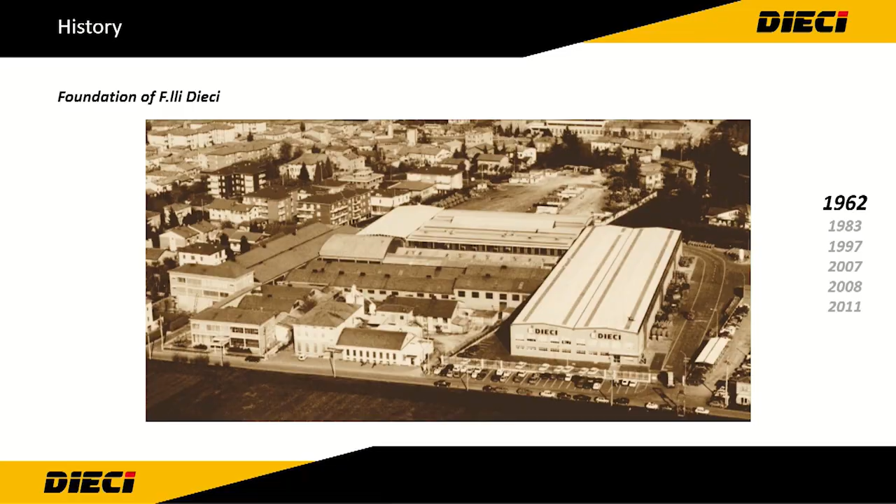Dieci was born in 1962. In 1983, they designed and developed the first telehandlers. In 1997, Fratelli Dieci becomes Dieci, a group of industrialists with dedicated experience in various Emilian manufacturing sectors buys out the company and relaunches the business mainly on machinery.

In 2007, new facilities were inaugurated. We can see the picture. In 2008, Dieci decided to manufacture the first vehicle designed specifically for agricultural application, and the two main ranges for agricultural application, Agri Plus and Agri Tech, came onto the market.

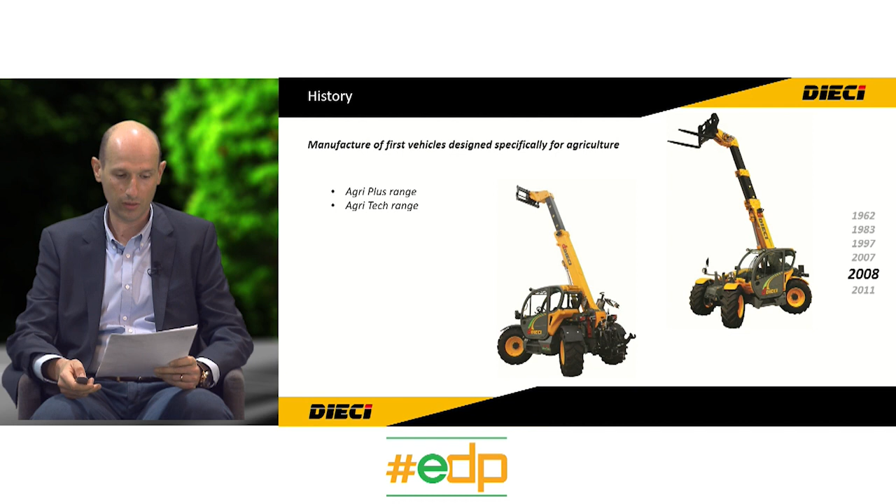Today, the facility of Dieci reaches a surface of 120,000 square meters, of which 40,000 are covered. Dieci is represented in 70 countries around the world with 440 dealers and 3 branches. The production of machinery at Dieci in 2019 reached 2,800 machines, and the turnover reached 163 million euros.

Yeah, and we know from direct experience how much Dieci is investing in innovation and always trying to get improvement in machinery evolution. I will briefly explain the context where the ALS solution was born.

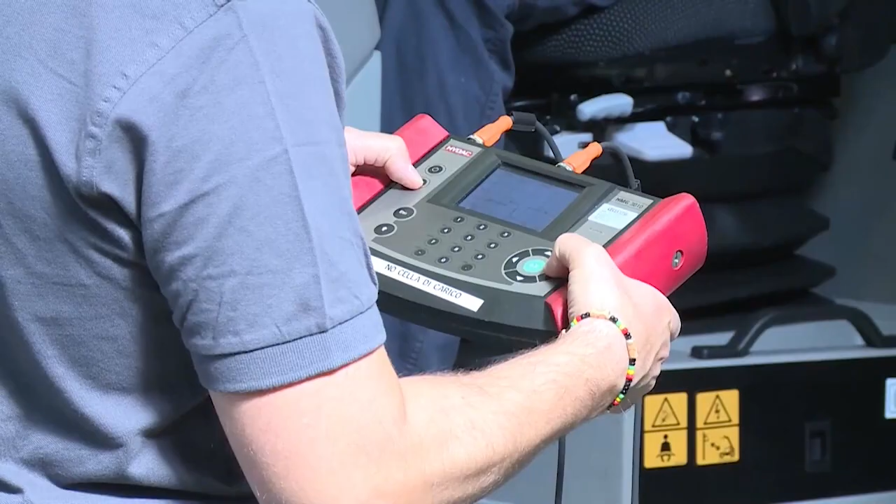The ALS solution was conceived in Valvoil Research and Development. Valvoil is a company that is investing a lot in research and development, and the research and development department is strictly collaborating together with our test department. The test department of Valvoil is probably one of the most advanced hydraulic laboratories in Europe, and there is a possibility to develop the complete product and also test it on the machine.

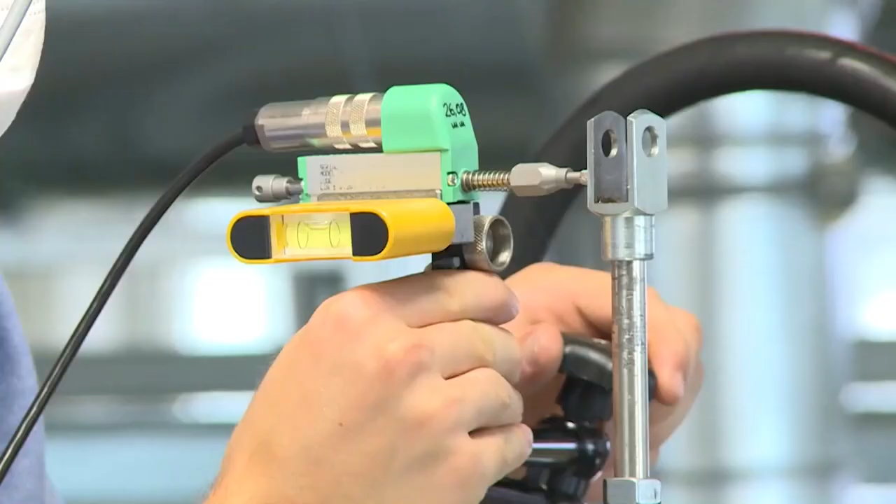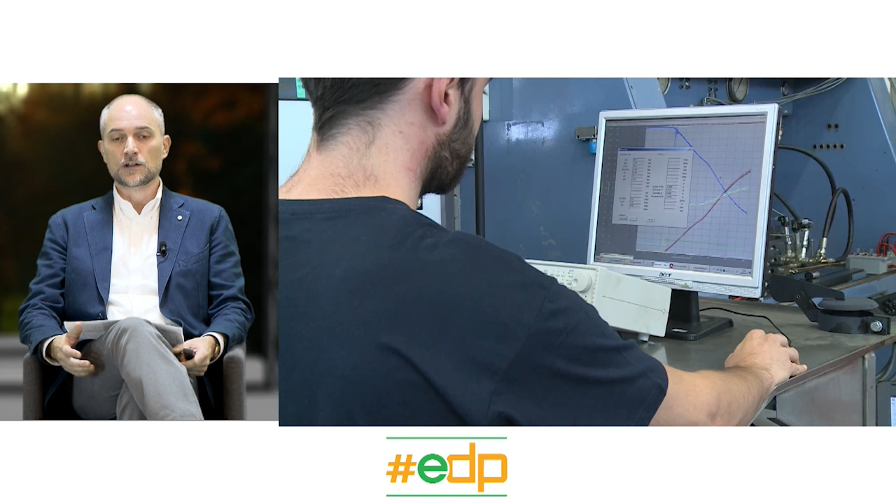The research and development at Valvoil is very focused on environmental issues. We are always trying to find a better solution with higher efficiency, and we are mainly focusing on two different lines of research. The first is energy recovery, but we will not talk about this today. The second line of research is the combination of components, trying to find the correct, ideal matching of different components in order to maximize efficiency on the machine.

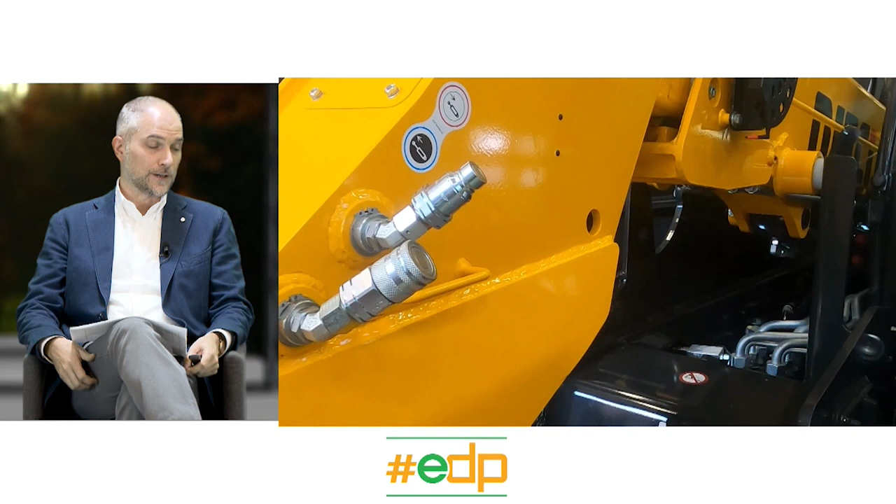This is the way Valvoil is investing, trying to find answers and provide a better solution for the market, helping our customers face the challenges coming from the market itself. We know that the machinery market is getting more and more difficult due to the regulations and standards that are coming, so there is a strong need. We strongly believe there is a bigger space to improve the efficiency of the hydraulic circuit.

Can you tell us a little more about the context of the machinery development? Yes, the Stage 5 compliant diesel engines are the last frontier in terms of emission limits.

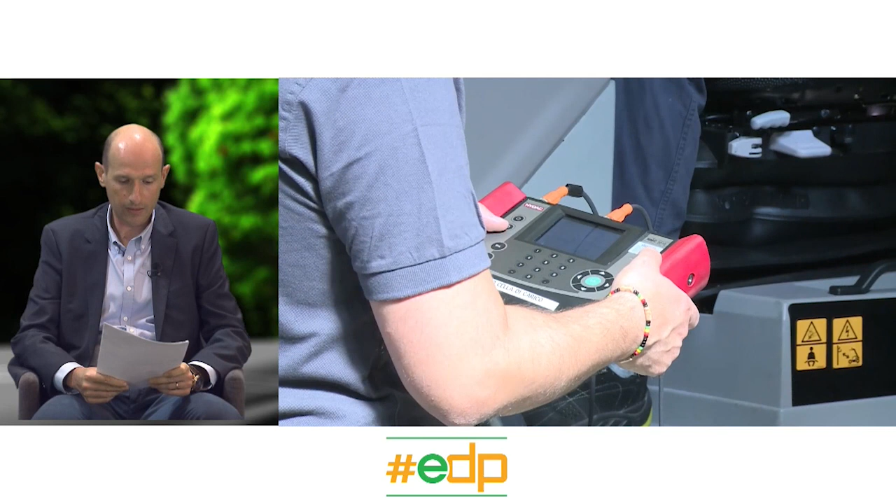Enrico, you highlighted very well how important it is to match mechanics and electronics in order to find a good solution for the efficiency of machinery. And Francesco, you are a mechatronic engineer, so nobody better than you knows how important it is to match these two domains together today.

Yes, Davide. We know that the integration of mechanics and electronics can allow us to explore new possibilities and features in the hydraulic field. Valvoil believes in this technological progress, and thanks to the electronic component, it's possible to provide a new operating mode for the operator on the machine in order to improve the operator experience. So thanks to this software, it's possible to customize and shape some movement on the machine.

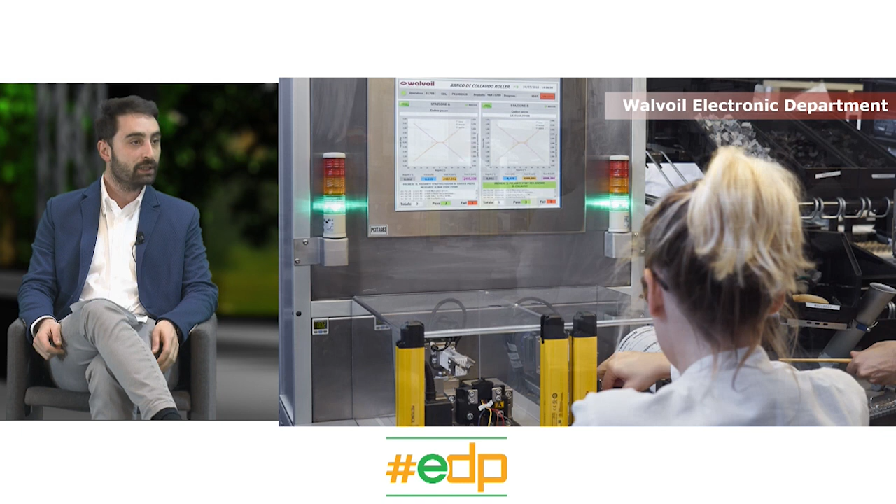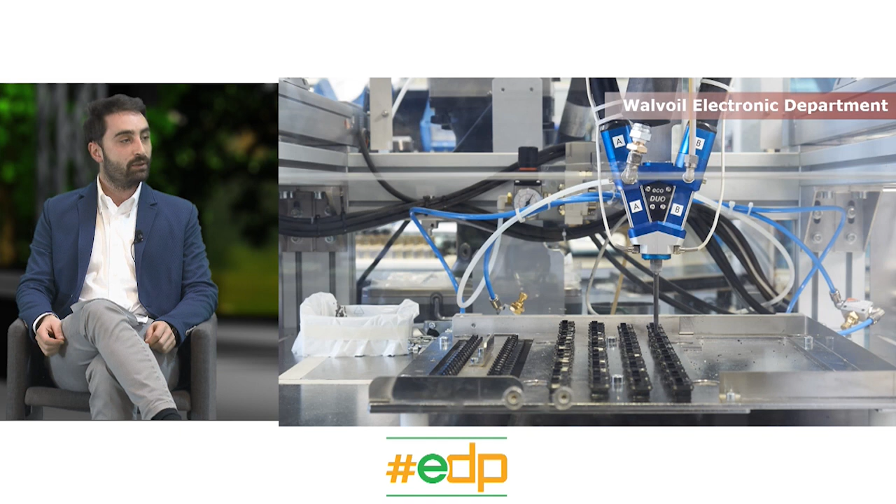This is possible thanks to this software and the experience of the electronic Walvoil department, with 20 years of experience and a wide range of products, starting from the handle and joystick for the movement of the hydraulic components, until the ECU, sensors and software to monitor the parameters at stake.

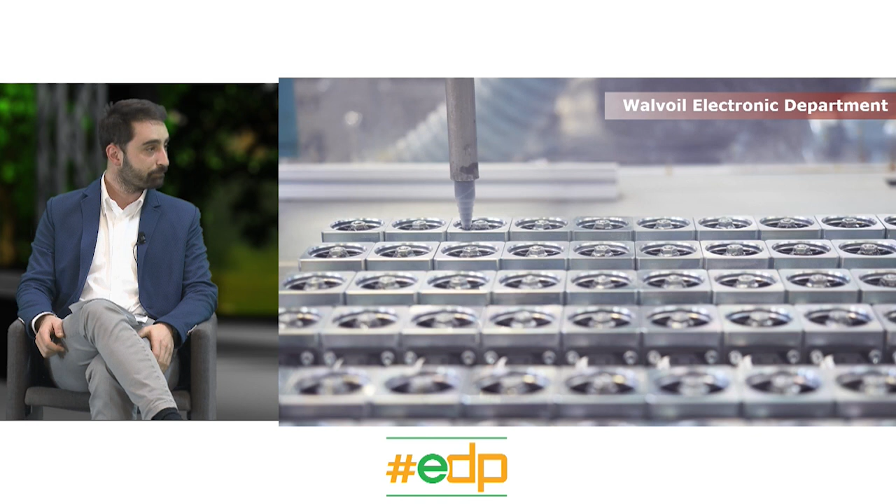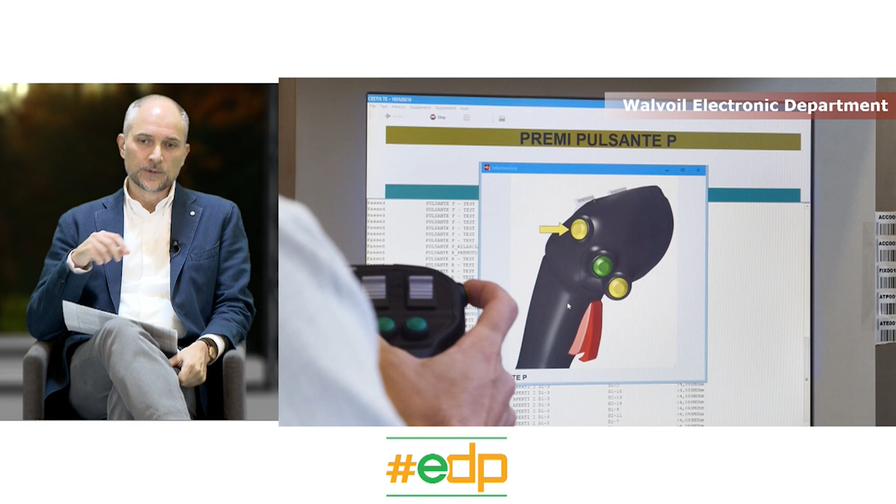Okay, a very big challenge. I think we can go a little deeper into the system and try to understand how the ALS system works. We have a presentation where we can show you the details. So we will start this presentation.

Okay, the ALS system is perfectly matching together with the flow sharing valves. It matches actually with whatever flow sharing valve is available on the market, but of course it has been optimized and works in perfect combination with the Walvoil flow sharing valves. The Walvoil flow sharing valves are normally split into two big families, the DPX family and the EX family, which approach the world of different machinery with two slightly different technologies.

The ALS device is available in a manifold solution, which you can see at the center of the slide, or it can also be available integrated into the inlet cover of a complete valve block. In this case, you can see the integration into a DPX 100, the DPX 100 being one of the most diffused and best-selling valves from Walvoil.

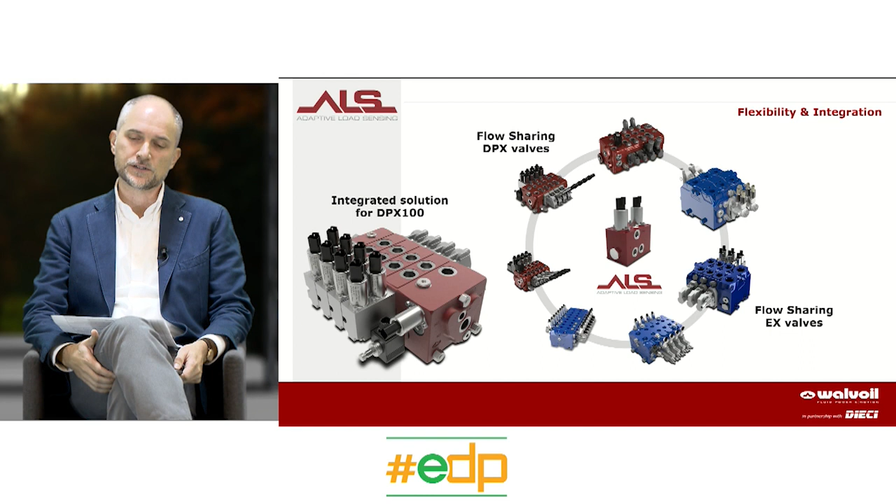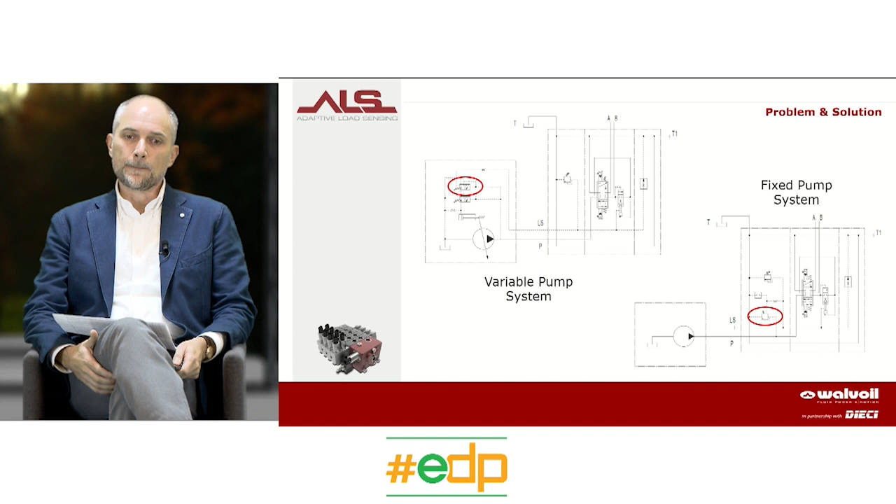So we go directly to the point, to the problem. When you have a hydraulic valve block connected to a variable pump, you are always paying a certain dissipation given by the controller of the pump. In order to realize perfect controllability of the system, you always need to provide a pressure that is higher than the pressure actually required by the user, by the load. Also, if you work with a fixed pump, this kind of system is more economical, more cost-effective, but also much more inefficient compared to the variable system.

In this case as well, when you are using load sensing and flow sharing valves, you are paying a dissipation through the inlet compensator spool, which always provides an additional pressure drop that is functional to the controllability of the load.

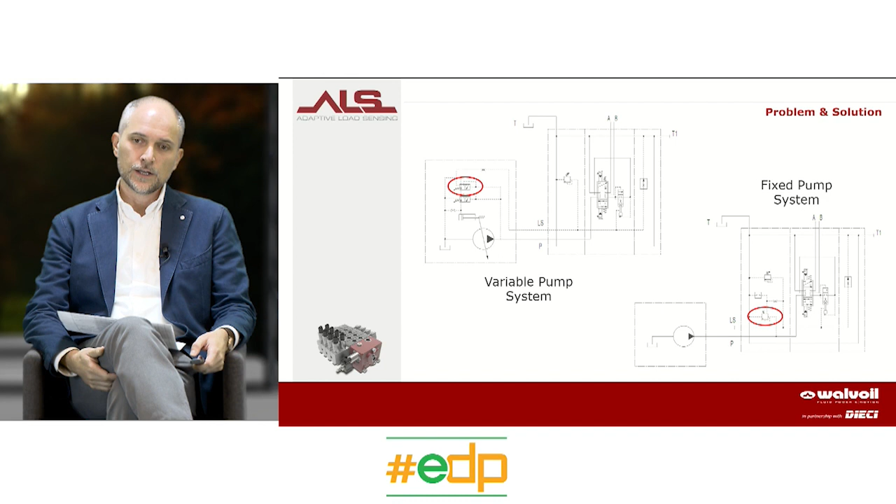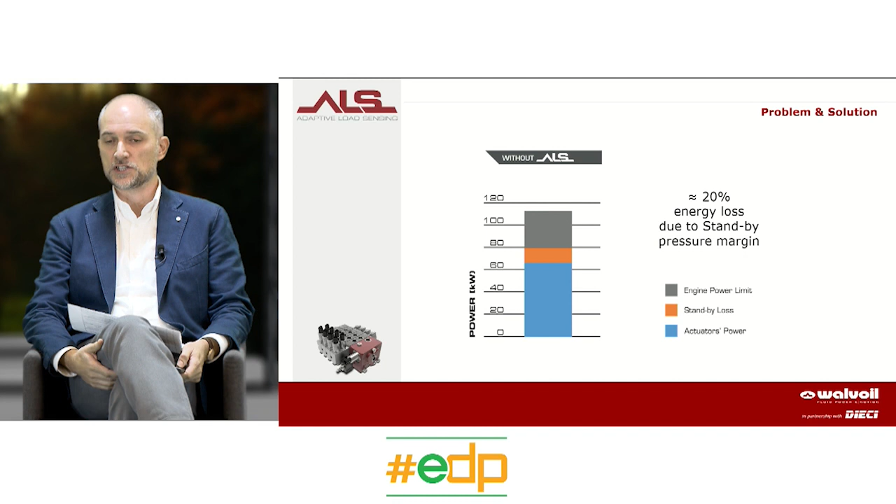So the target and aim of the ALS system is exactly to introduce a new variable into the system, having the possibility to modulate and modify this pressure margin according to the working condition, in order to optimize the system and find the best efficiency condition to work in.

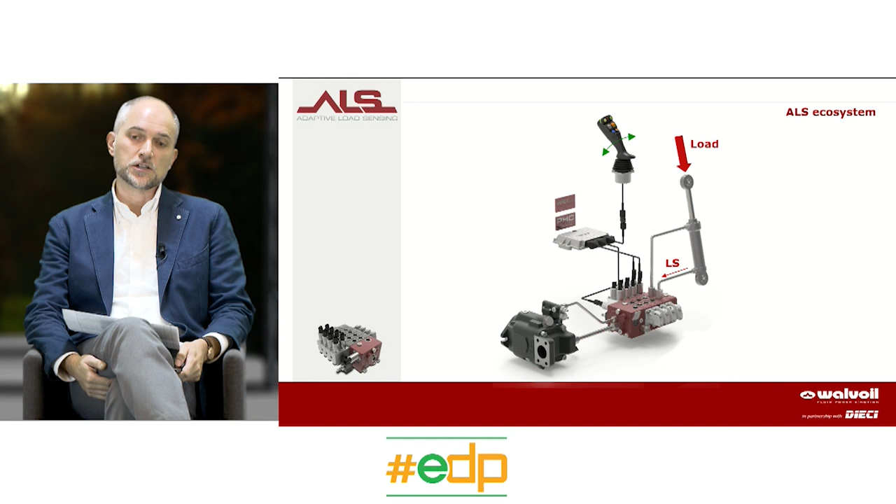This is a representation of the complete system where you can recognize the variable displacement pump, the valve block that is including the ALS device, an electronic joystick, an ECU controlling and giving the brain to the whole system, and one actuator. When you operate the joystick through the ECU, you displace the spool of the main valve and you are feeding the actuator.

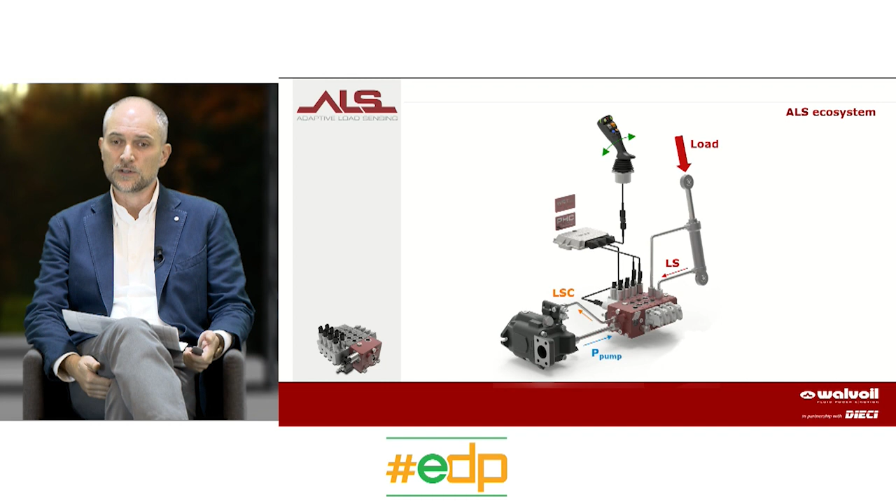The actuator can send the pressure information to the valve through the LS line. Normally, this LS line is transferred directly without any change to the pump, but in case of the ALS, it is modulated by the ALS itself and modified into the LSC signal, so that the pump can provide a pressure that is related not to the real load sensing, but to the modified load sensing signal LSC.

So if you want to check how it works in a diagram, here you can see that the joystick is giving information to the ECU. The ECU is communicated to the valve, is collecting the real load sensing from the load, but then this load sensing is modulated through the ALS system, thanks to the input coming from the ECU. And this LSC is delivered to the pump.

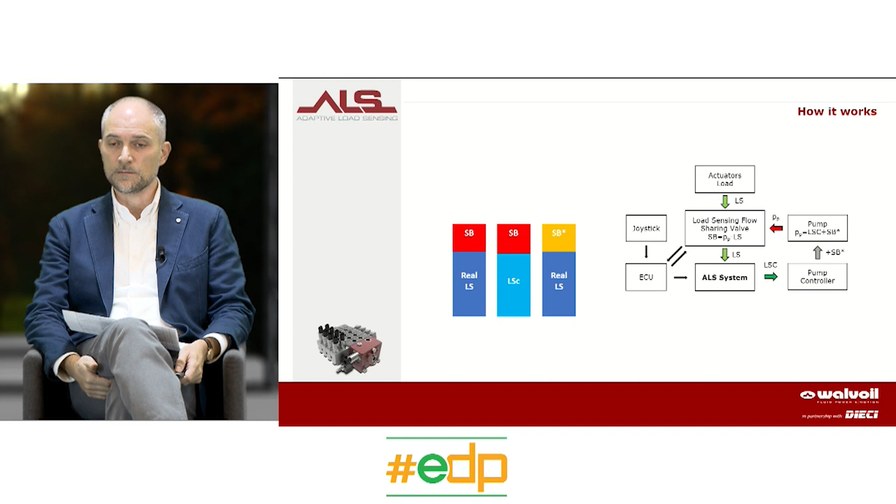The pump will add its natural standby, but the pressure P that is resulting into the system is actually modified, resulting in a different pressure drop across the spool. Here this animation is showing the variable standby that you actually have on the spool of the valve, and so you are conditioning the speed and the control characteristics.

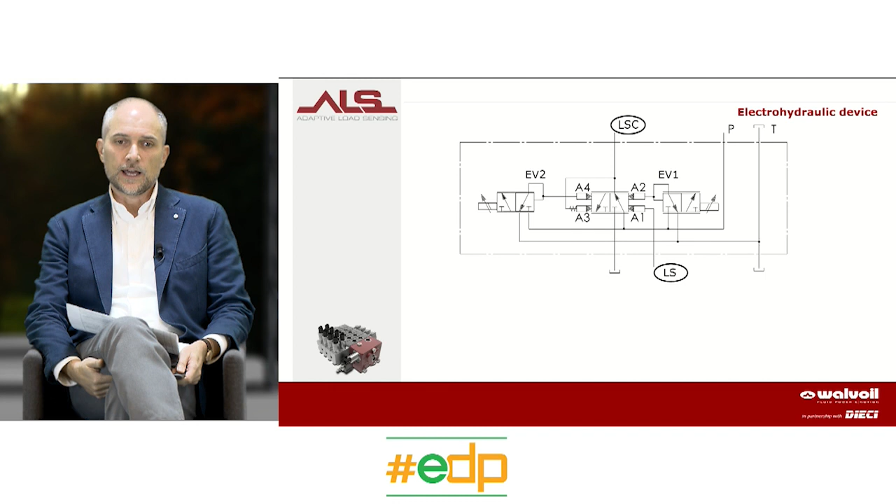The heart of the ALS system is simple hydraulic hardware, mainly represented by a coping spool based on a 4-signal solution. And this coping spool is conditioned by 2 pressure-reducing valves.

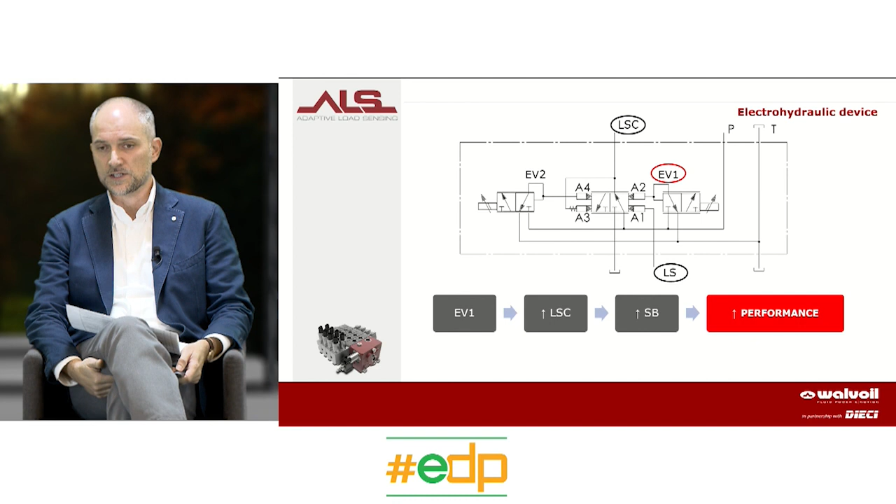The first pressure reducing valve is deputy to increase the load sensing, the LSC signal, and therefore to increase the standby, giving an additional performance to the machine, while the second electro valve is deputy to reduce the LSC, therefore reducing the standby, and giving more controllability and more energy saving possibility.

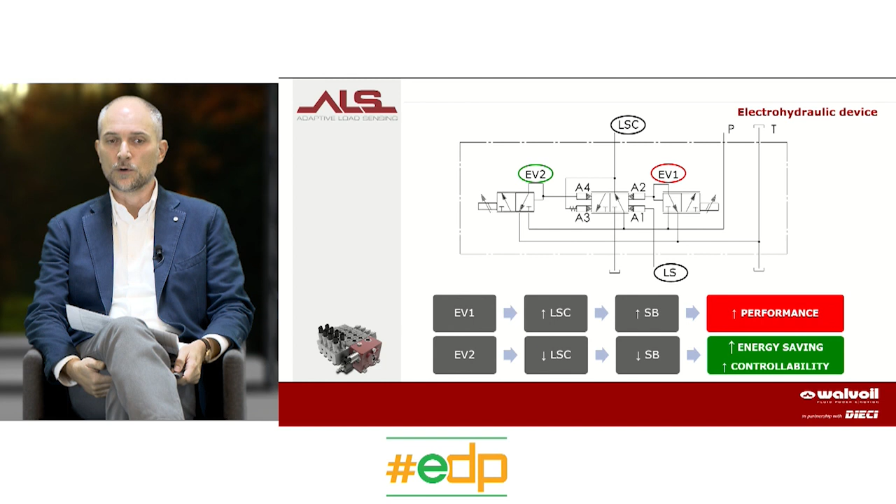During the development, we had the opportunity to release a patent that has been already approved. We thank the organization of Eima.

We have the honor to have received the award for both innovation and sustainability for this project. And it is also worth

noting that this project was developed also in collaboration with the TASC project. The TASC project is a project that has been financed by the European community, involving the most important laboratories and universities in Emilia-Romagna, and Walvoil is participating as an industrial partner.

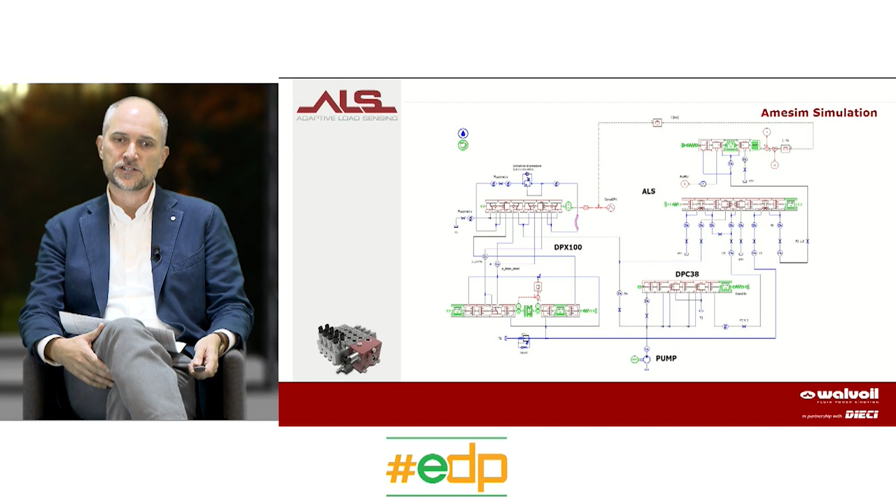During the development of the ALS, we went through 3 different phases. The first phase was the simulation that we made through monodimensional software in order to check and analyze what are the benefits, the possible benefits of the solution.

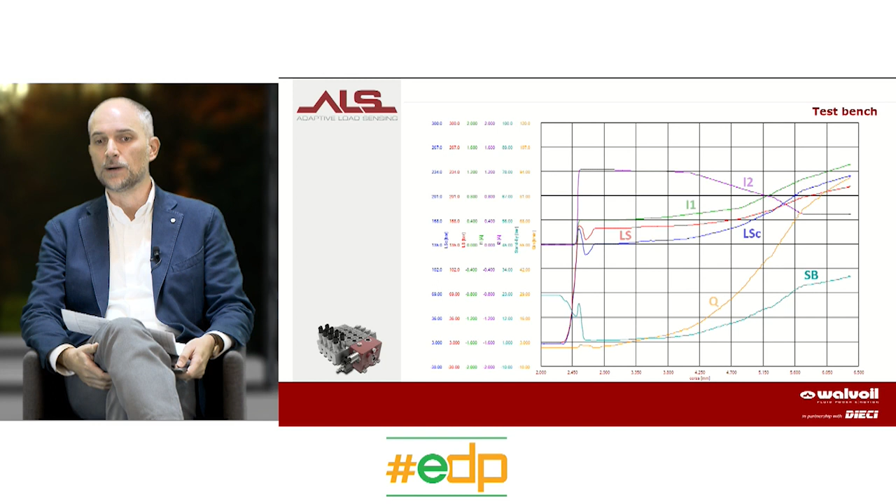As you can see, the natural load sensing is in red, but the modified load sensing, LSC, is in blue. So we start with a reduced load sensing, and then at the end of the stroke, we reach an increased load sensing. This allows us to change the standby across the valve from 1 bar up to 30 bar, shaping and modifying the delivery curve, the delivery flow onto the actuator.

Then we have a third phase, and the third phase is the application of the system on a real machine to test the benefit and understand what is the real result on a real machine. And here is coming the collaboration with Dieci.

Enrico, can you tell us why you chose this kind of machine and what are the characteristics of this machine?

Davide, we chose the Agriplus, that is one of our most important machines for the agricultural market. Agriplus comes in 2 models: 42.7, 4.2 ton lift capacity at 7 meters, and 40.9, that is 4 ton lift capacity at 9 meters.

Agriplus is a high-performance telehandler that we developed and studied for professional use, for customers that need high performance on telehandlers. The Agriplus includes the new cabin developed together with Giugiaro Design, where we introduced many improvements focused on the comfort of the operator.

It's a wide cabin with precious materials, soundproof materials, with an exclusive hydraulic suspension system.

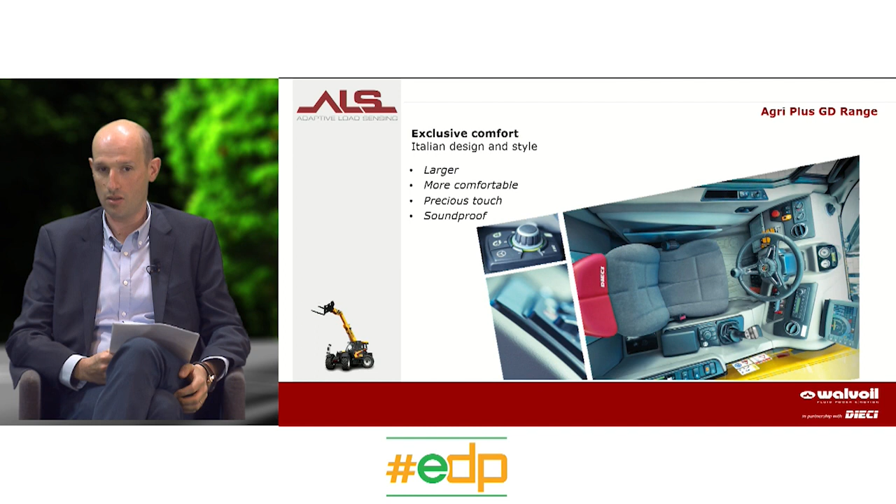On the Agriplus, we tried to introduce total visibility with a panoramic view, with wide windows, and with a fine study of ergonomy to give the operator maximum comfort. Every command, every control is in the right position, easy to reach.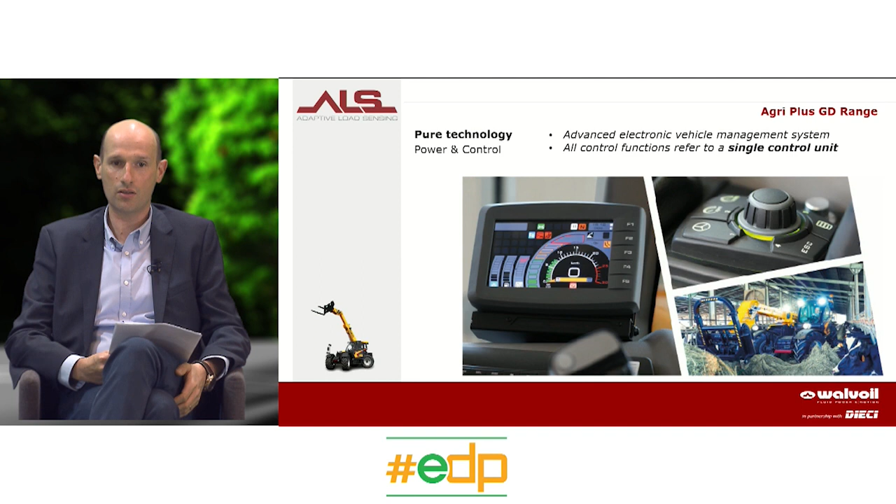In the Agriplus, we introduce high technology with an advanced electronic management, and with a single control unit, we can manage all the functions included on the machine, integrated with the diesel engine.

With this high technology, we give a high performance machine with a high performance engine, 114 kilowatts, stage 5, with an electronic integrated control and a low emission.

This integrated electronic system management performs also a very strong and fast transmission with a cruise control in the cabin that can manage 4 different drive modes. And combined with these drive modes, we can add also the management of ALS.

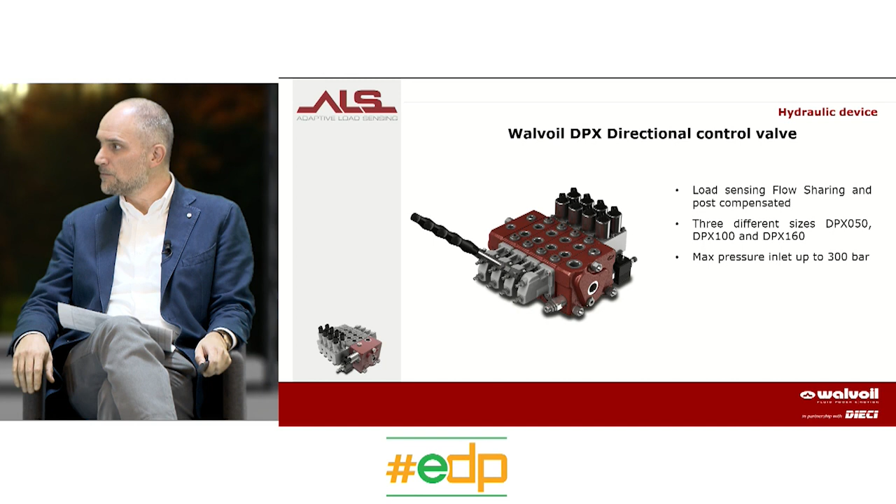Okay, thank you, very interesting. If we go a little deeper inside the real hydraulic heart of this machine, we can summarize which are the main components that are taking part into the ALS system.

The ALS ecosystem is composed by Walvoil DPX. The DPX family is a family of post-compensated load sensing flow sharing section valves. There are 3 different sizes of DPX, the DPX 50, 100 and 160. The difference between these sizes is for the workflow port, and the 3 sizes have the same max pressure inlet up to 300 bar.

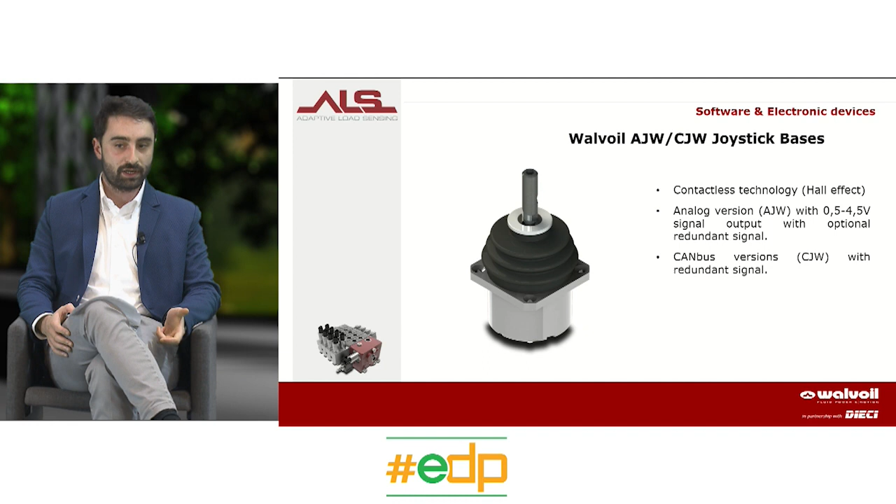The second component for the ALS ecosystem is the Walvoil joystick. This joystick can be in 2 different versions: an analog version, the AJW, with an optional redundant signal, and a CJW with a redundant signal, but in a CAN bus version.

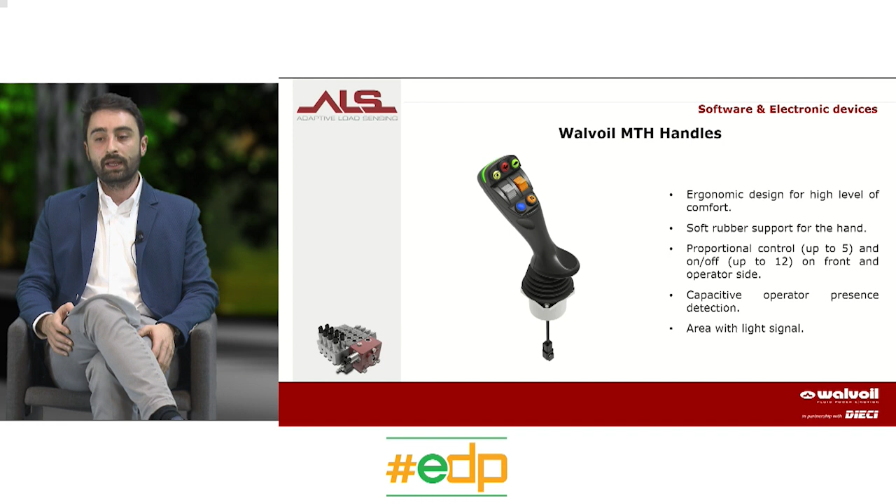And in order to have an ergonomic design, it's possible to use the Walvoil MTH handle. This handle has a capacitive sensor that can detect the operator presence. But the real heart of the ALS system is the ECU Walvoil.

In particular, the CED 1200. With this ECU, it's possible to control 12 sections of section valves, and with the 24 inputs it's possible to acquire digital frequency and analog signal. There are also 2 sensor supply outputs.

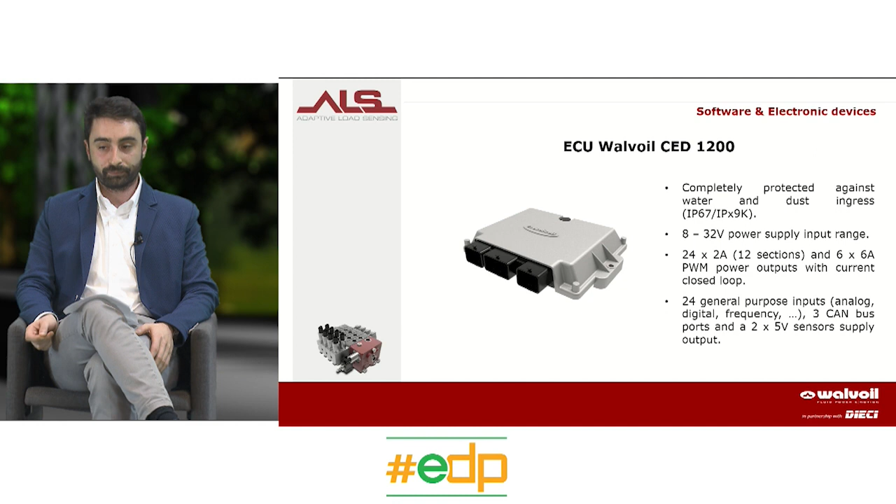And then the software. With the PHC Studio, the proprietary Walvoil software, it's possible to program the ECU with one of the programming languages cited by the IEC standard.

In particular, it's now the ALS software moment, and the ALS is programmed with an SFC language, a sequential function chart, and with this software it's possible to obtain all the modes of the ALS. In particular, there are transitions and actions that command the different modes of the ALS system.

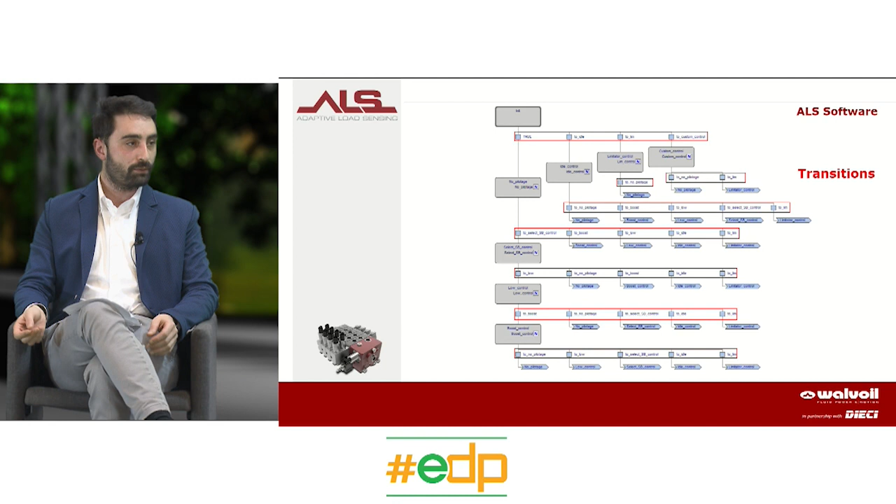With the transitions it's possible to exit or enter from different actions. So when a transition is verified, this means that the operator will change the operating mode from the actual one. And the actions contain the instructions for the operating mode that the operator has chosen.

Okay, great. And so which are the functions? Yes, the ALS have two types of activation: desired activation by the operator, or automatic activation by the software.

For example, this is a security when the machine is on, and an automatic activation can be the power limitation, for example.

But the desired activation by the operator, the basic function of the ALS system, can be the boost, for example, or the precision. In particular, with the boost, it's possible to increase the flow rate to the actuation in order to have greater machine speed and productivity with an increase of standby.

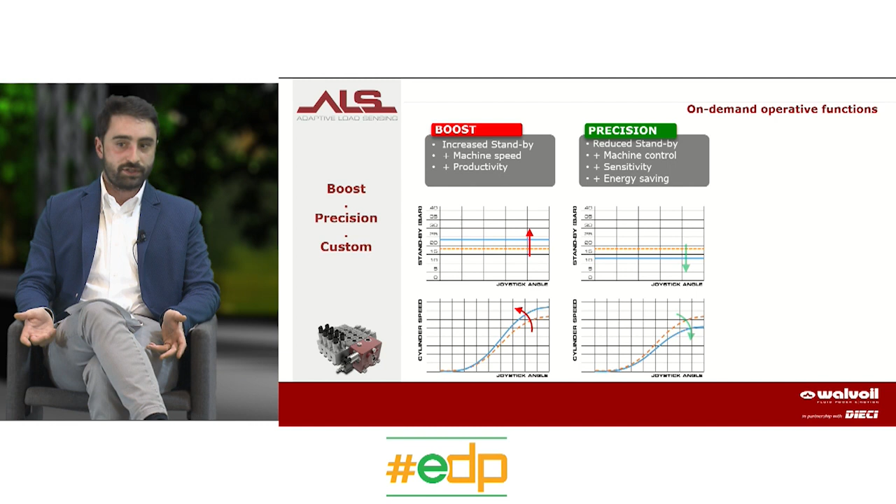And on the opposite side, there is the precision. With the precision mode, it's possible to have greater machine control and sensitivity because we have a reduced standby and flow rate.

But the most important function in this case is the custom. This is a function that is a combination of the two previous modes. In fact, with the map that correlates the angle of joystick and standby, it's possible to obtain a custom curve with a particular application, and this is tuned for some particular application on the machine, for example.

So we can shape exactly the delivery curve to the actuator, customizing and also making it more comfortable. Yes, for example, in the initial part of the curve, it's possible to obtain a precision.

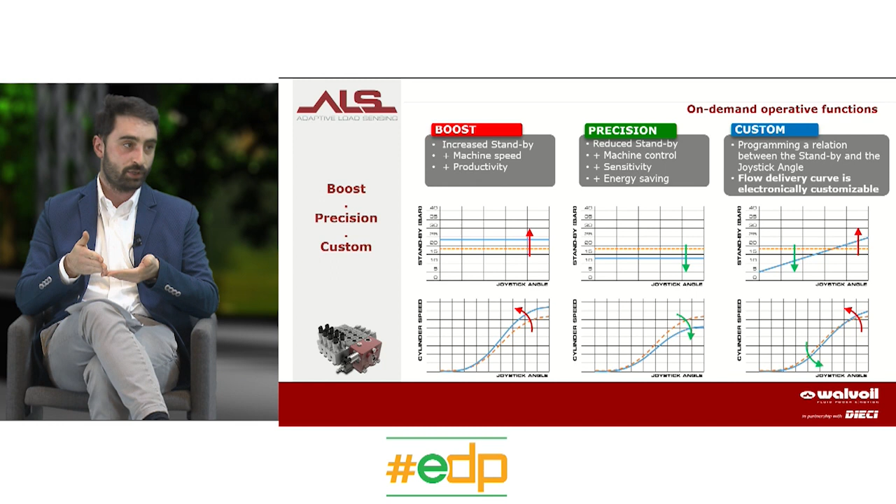So for a movement that requires bigger machine control, it's possible to obtain at the first part a precision. But when a movement is ended, it's now the time to go, and the boost condition is activated.

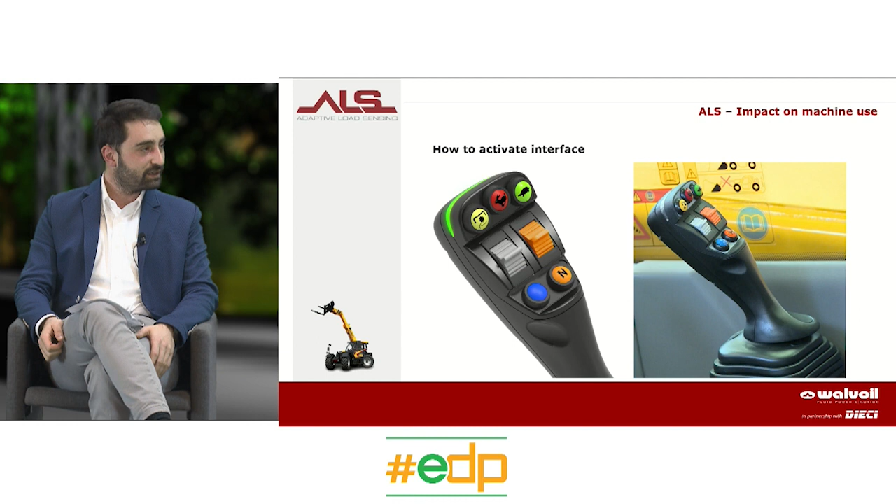Okay, but on the machine, Enrico, how is it possible to activate the ALS system? Yes, we integrated the ALS activation system by integrating two buttons on the grip of the joystick, the green button and the red one. And acting on these two buttons, the operator can ask for standby reduction or standby increasing.

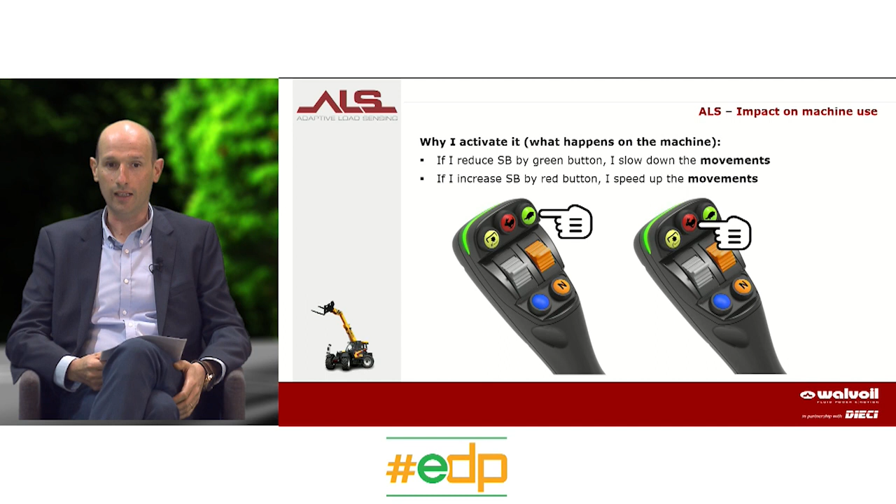If we push on the green button, the standby is reduced and the movement slows down. If we push the red button on the grip, the standby is increased and the movement speeds up.

With the green button, we can lower the standby until 6 bar, and we can reduce the flow rate from 120 liters, for example, to 70 liters. This means reducing the speed of the movement, even if the stroke and the angle of the joystick doesn't change, so without losing the resolution of the control. Yes, and the main benefit of this is better sensibility and better control for the operator.

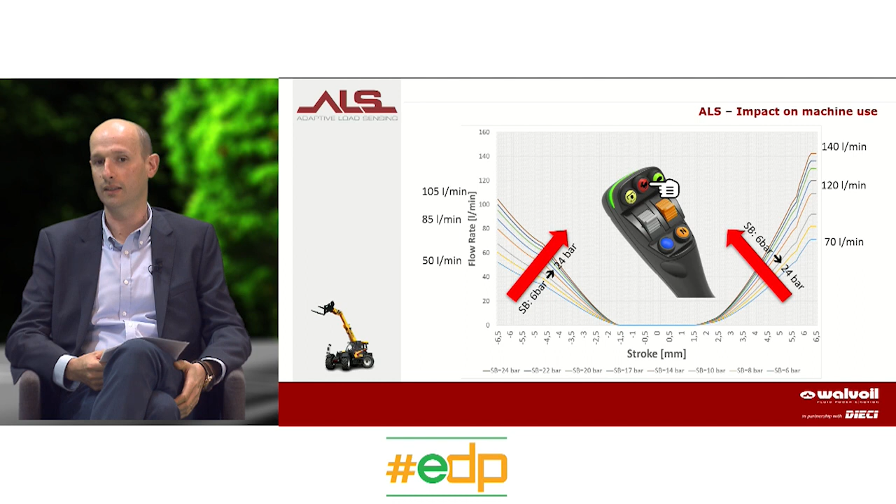The same way, we can increase the standby. For example, if you want to increase the speed of the movement, we can push the red button and go from, for example, 120 liters to 140. For certain applications, when the user of the machine is confident and needs speed, with the red button we can get it.

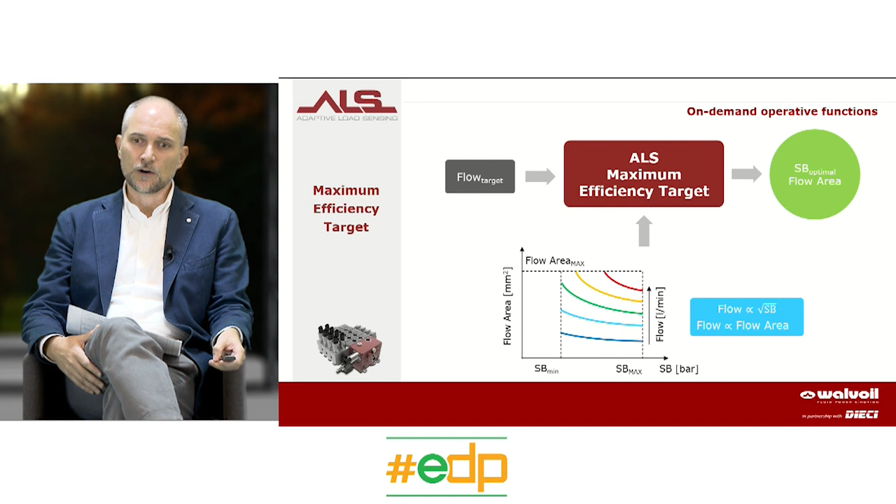And these are not the only possible on-demand functions of the ALS system. For example, there is also, and this is probably one of the most complicated from the software point of view, with more software behind it, the possibility to look for the maximum efficiency target. It means that the system, by reading some parameters on the machine and having inside the complete mapping of the spool and the characteristics of the directional control valve, can make some advanced evaluation in order to find the best efficiency condition to realize a specific flow.

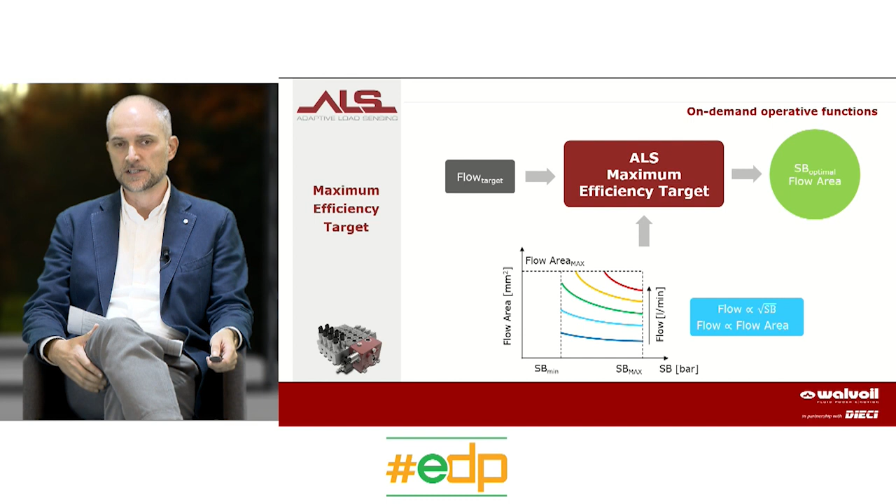So actually, in this situation, the joystick electronically is setting the expected flow requested by the user, and the system decides by itself under which condition to reach that specific flow.

We are using some mapping similar to the diagram you can see in this moment. It's a typical map where we have on the x-axis the standby pressure, so the standby margin, and on the y-axis the spool displacement, meaning the passage area, the metering passage area. The curves you can see are isoflow curves, meaning we can reach a specific flow for different combinations of standby and spool position.

A normal system will work across this dotted line, so there is a fixed standby, but the ALS system can try to reach a specific flow through another path, reaching the flow in a different condition while minimizing the standby. Of course, there must be a mapping deciding when it is worth or not. Sometimes there's a compromise to be found, but there is a huge possibility to increase the efficiency of the machine, using an adaptive algorithm to reach this result.

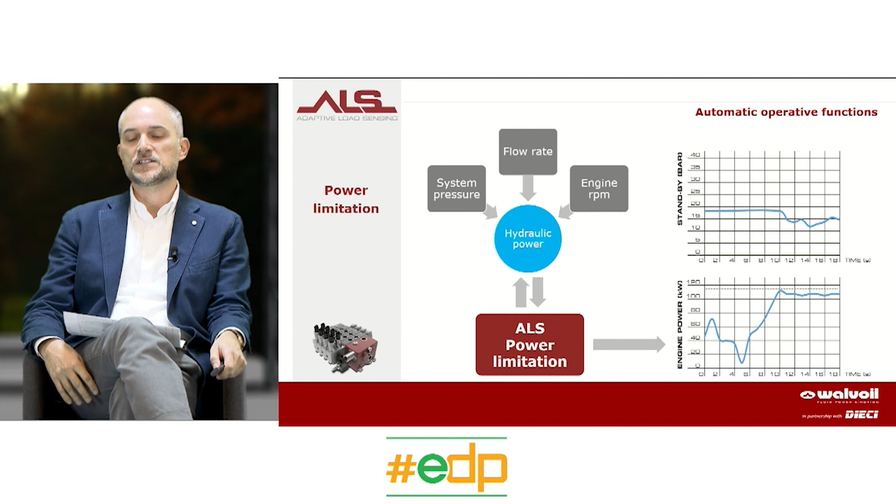Another typical additional function, in this case not on-demand but automatic, is the power limitation. When the system can collect the system pressure, the flow rate, and the engine RPM, it can automatically evaluate the power requested by the operator and compare this power to the power limit given by the ICE engine. If we are reaching the maximum allowable power, the system will automatically reduce the standby, having a benefit in terms of pressure, but mainly a benefit in terms of reduced flow, so that the machine is kept under a certain power limit and doesn't stall.

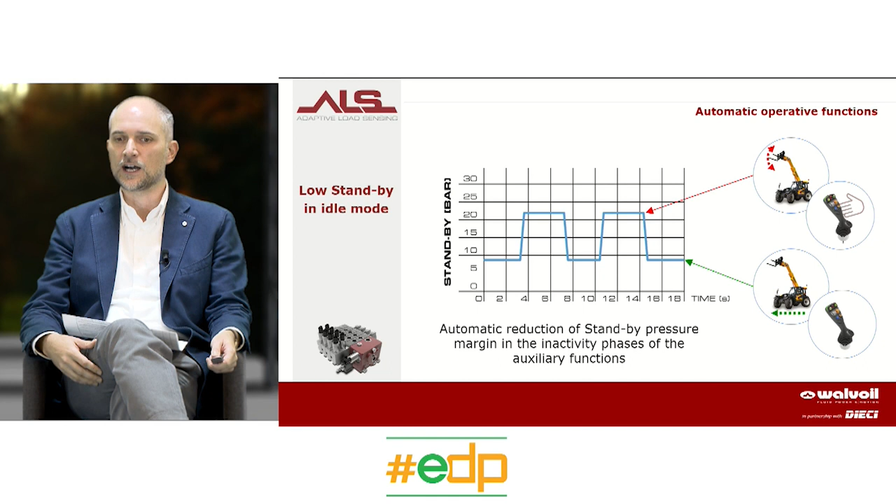Another typical application is, for example, the possibility to use the dead man sensor, a capacitive sensor, for detecting the presence of the operator in the grip in order to activate or deactivate the standby. When the auxiliary function and the boom are not used, there is no reason to keep the standby at a high level, so we can drop it down to achieve additional efficiency.

So I think, Enrico, we can give a general summary, understanding exactly what we can see on the machine as a benefit, summing up all this functionality together.

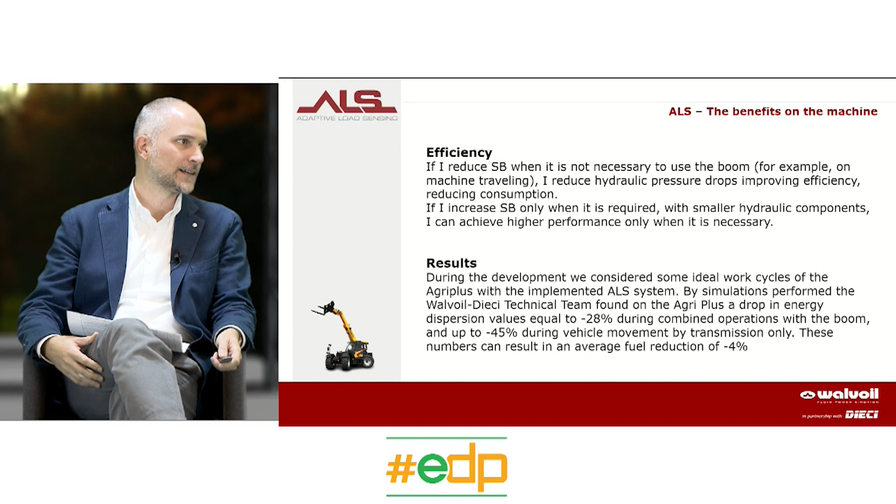Yes, we speak about efficiency, and the ALS can help us achieve efficiency, because if we reduce the standby when it's not necessary to use the boom, for example during machine traveling phases, we can reduce the hydraulic pressure drops, improving efficiency in general and reducing consumption.

If, in opposite, we increase the standby only when it is required, with small hydraulic components, we can achieve higher performance only when it's necessary and only when the operator asks for it.

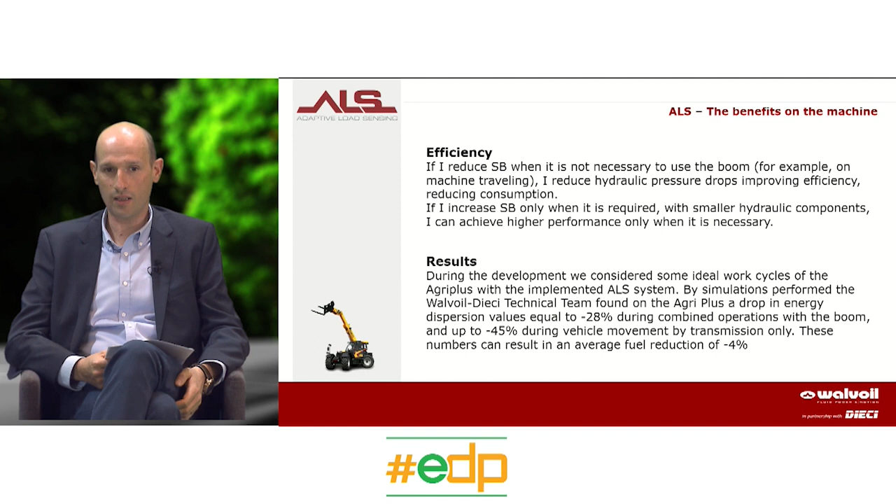The results we found during development are based on some ideal work cycles of the Agriplus with the implemented ALS system. By simulation performed by Walvoil and Dieci technical team, we found on the Agriplus a drop in energy dispersion of about -28% during combined operation with boom and transmission, and up to -45% during vehicle movement only by transmission. These numbers can result in an average fuel reduction of -4%.

The efficiency is not the only benefit we can get. We can also consider the reliability of the machine equipped with the ALS, because if we reduce the standby when it's not necessary for the machine operation, we reduce the stress of the components since we reduce the maximum pressure, and this extends the average life of the components.

We can also improve productivity, because with the automatic functions, if we reduce the standby, we reduce unwanted movement and improve the sensibility of the control. This also reduces the errors and mistakes that the operator can make, while maintaining the same joystick stroke and better sensibility of control.

If we increase the standby, for example to speed up the movement, expert users can get the best performance and increase the speed of movement when needed.

If we combine the automatic function of the ALS with the anti-tipping device, we can reduce the standby when the machine is near the tipping limit. In this condition, when we are at the limit, we can lower dynamic loads and stress and improve safety. A very important step for safety.

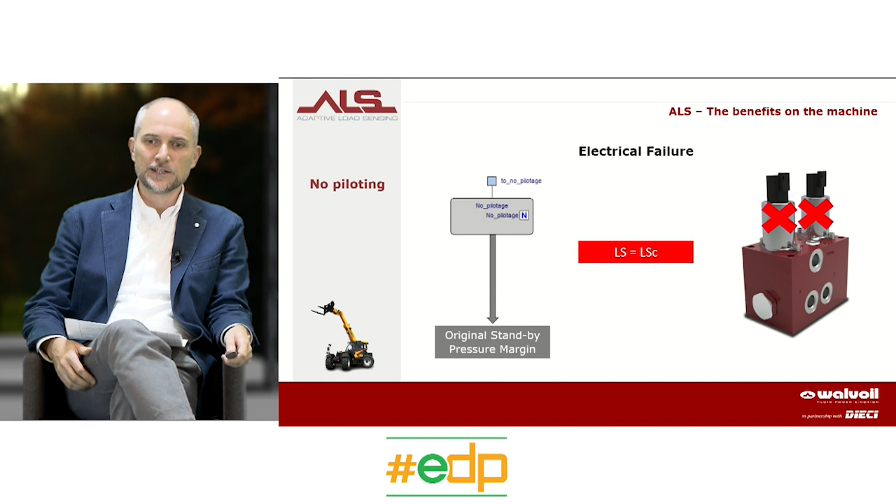We also have to notice and remember that the system is inherently fail-safe, because in case of failure of the electronics, if you are missing the piloting to the electro valves, it will simply replicate exactly the load sensing system, so we will get exactly a standard load sensing system without affecting the controllability of the machine. So it is inherently safe.

We can also speak about the versatility of the system, because that's interesting. We think Telehandlers are one of the most flexible machinery for agricultural application, because it's a multi-purpose machine that changes functionality by changing the interchangeable equipment.

We can adapt the standby to the interchangeable equipment connected to the machine. In this way, we can optimize the speed of the machine movements compared to the attachment. For example, with a man basket, the machine must move slower than with a bucket or a shovel. By modifying the standby, we can get high resolution on the control and low speed.

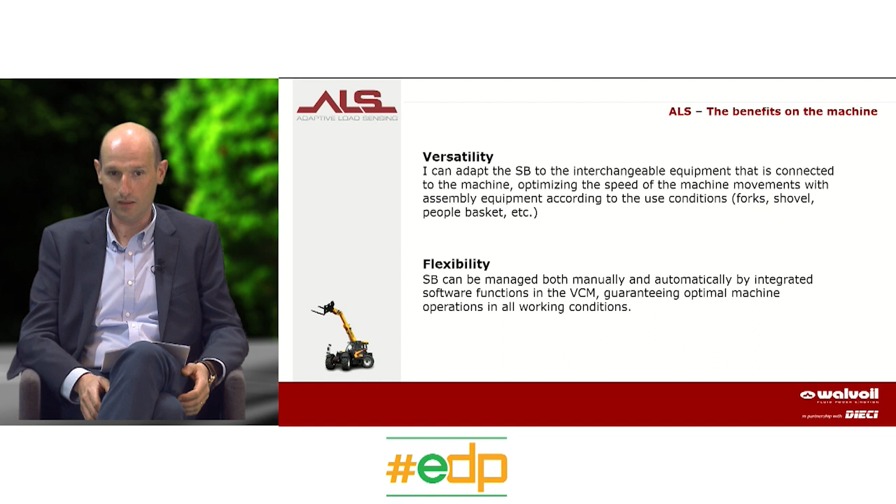Also, the flexibility is a big benefit, because the standby can be managed manually and automatically by integrated software function in the vehicle control management. This can guarantee optimal performance in every condition.

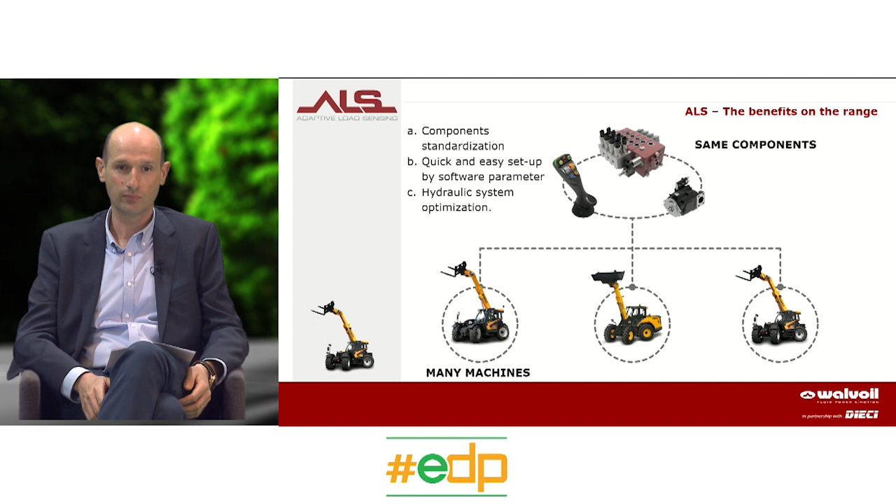The benefits are not related only to the machine, but as producers of machines, we can consider the benefit also across the range of our machines, because with standard components and one hardware, we can set up different systems, and in a quick and easy way we can configure the same components in different machines that require different standby settings. In this way, we can optimize the hydraulic system for each machine. Same hardware, then dedicated parameterization according to the specific need of every single machine.

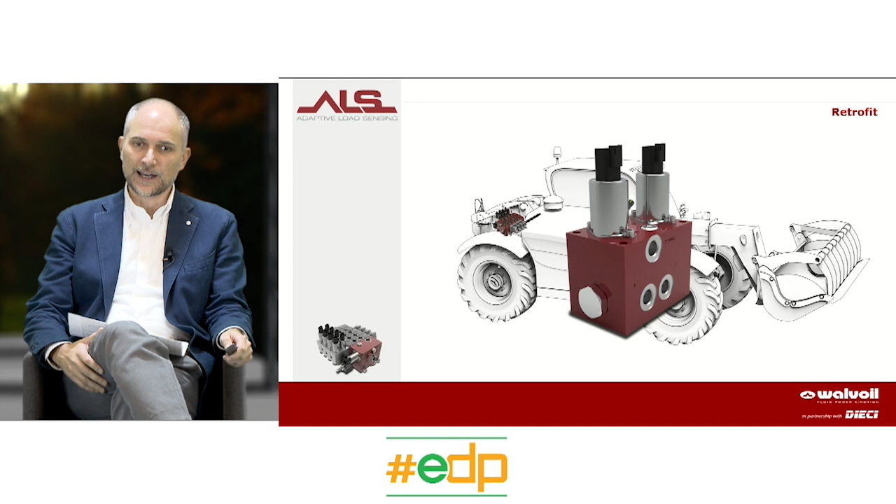I'll just add another interesting point. The components of the ALS system are so simple - they only require a dedicated manifold, an electronic joystick, and an ECU - that they can also be introduced into an existing machine. So we can also talk about machines already working in the market, and it is possible to upgrade the machine and bring it to new life, to a new level of efficiency. This can be an interesting solution also for the aftermarket.

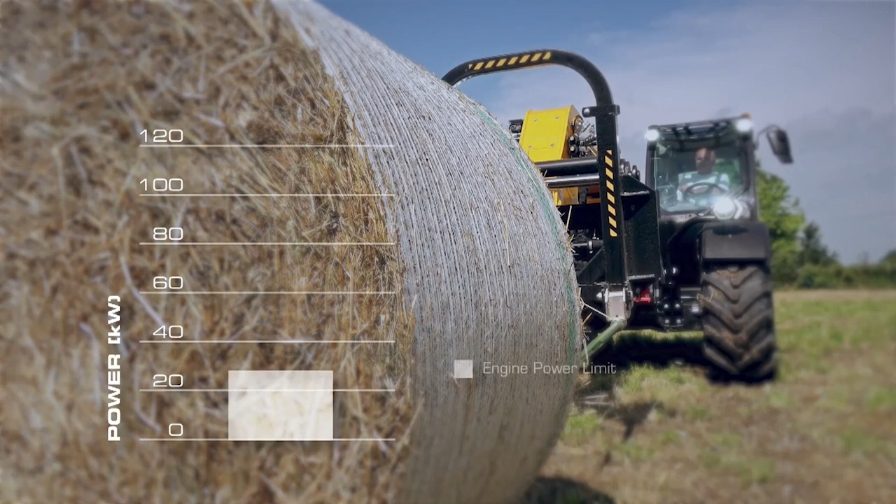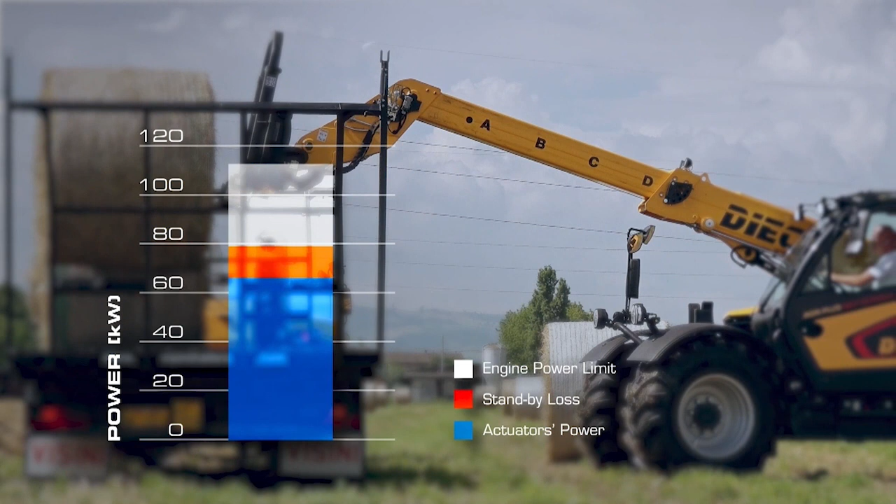The context: a typical cause of the loss of efficiency of a hydraulic system is the standby pressure differential. The hydraulic pump, in order to ensure the control of movements, generates a pressure constantly higher than the actually required one. It is defined as standby margin and constitutes an energy dissipation.

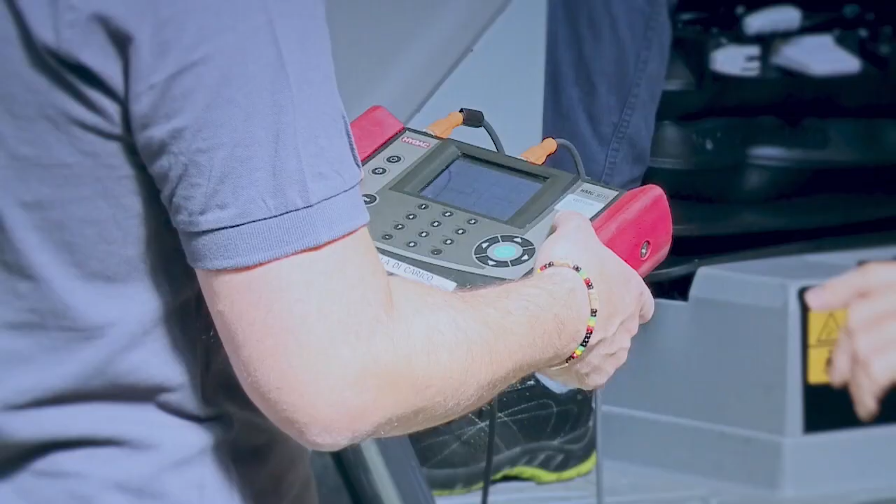The adaptive load sensing solution. Adaptive load sensing is the answer to this problem. The innovative system has been developed at Walvoil Research and Development Department and tested in collaboration with Dieci, a leading company in the telehandler sector. This development is also part of the TASC, Smart and Clean Agricultural Tractors project, co-financed by European funds of the Emilia-Romagna region and including the participation of international partners and the main regional universities and research laboratories.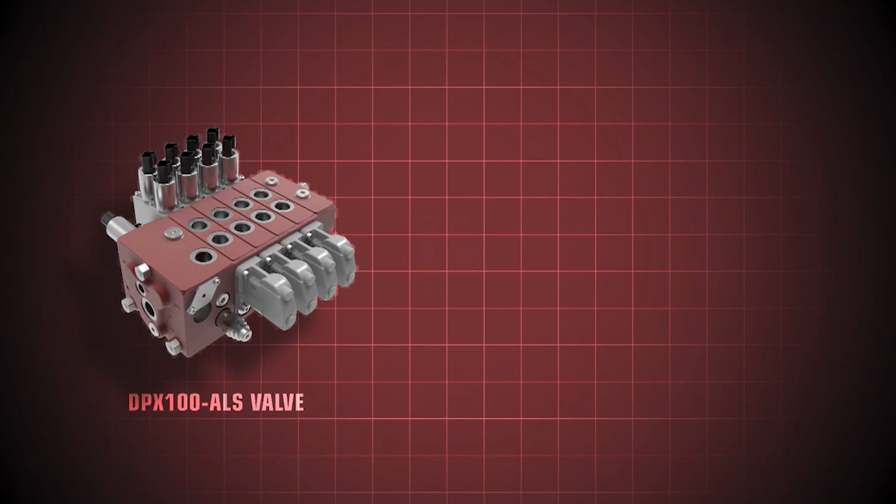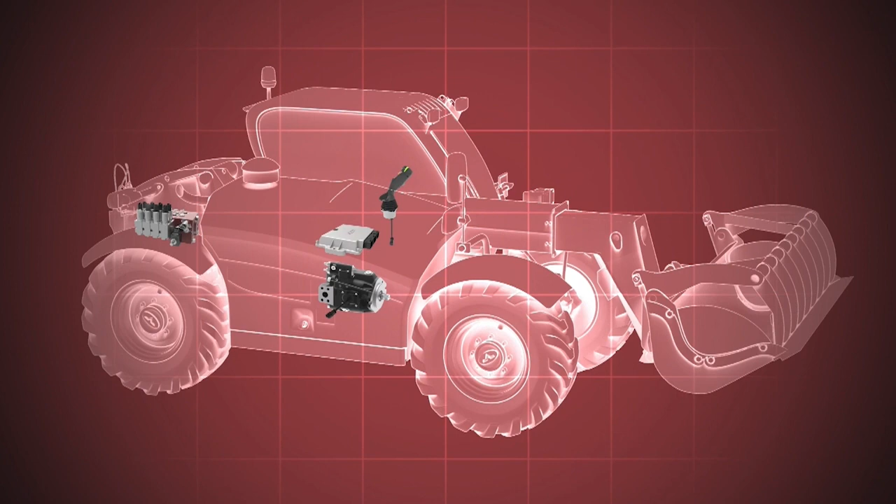Adaptive load sensing is patent pending. How it works: the system consists of a directional control valve, an electronic joystick, and an electronic control unit. The heart of adaptive load sensing is represented by an electro-hydraulic device fitted to the directional control valve, which allows it to dynamically modulate the standby margin in order to minimize energy consumption.

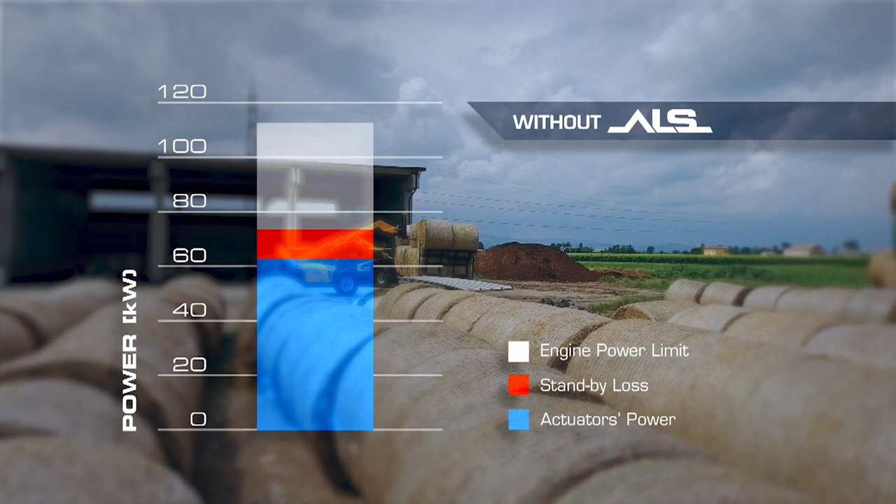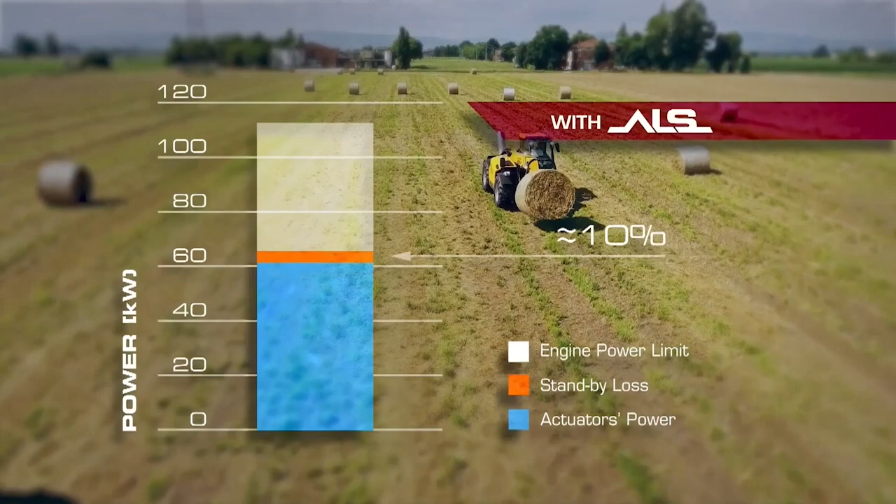In traditional load sensing systems, the standby pressure differential may lead to a dissipation, a loss of up to 20% of the system energy. And since it is preset, it limits the performance of the engine at the top of its operating range. Adaptive load sensing would bring the dissipation levels down to around 10%, therefore improving the engine performance across all duty levels on the engine performance characteristic curves.

The system consists of an electronic control unit that collects information from the operator and from the machine sensors. The electronic control unit operates the adaptive load sensing device, allowing it to raise or lower the load sensing hydraulic signal and consequently vary the pressure differential to dynamically adjust it to the efficiency and functionality requirements.

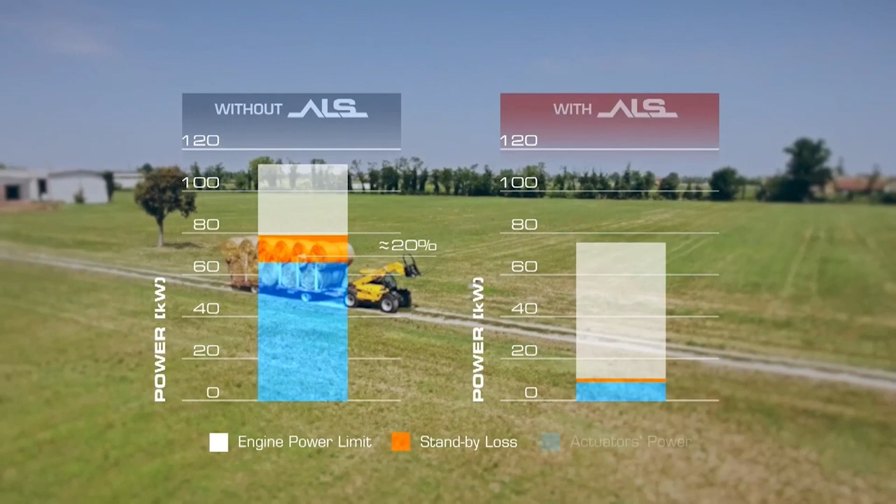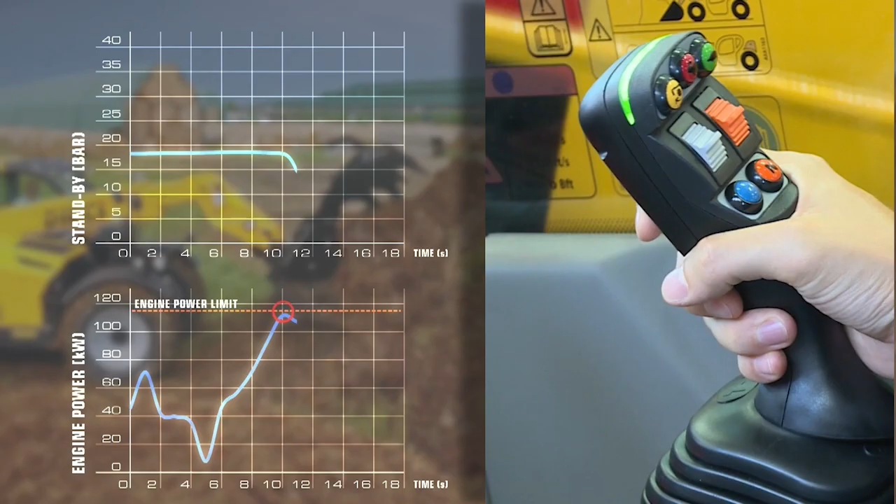The system is completely managed by a modular and customizable software developed by Walvoil using the PHC Studio proprietary tool. Operational functions: the software basically includes several automatic functions - selection of the maximum efficiency conditions, power limitation management to ensure full exploitation of the engine characteristic curve, and automatic reduction of standby pressure in the inactivity phases of the auxiliary functions.

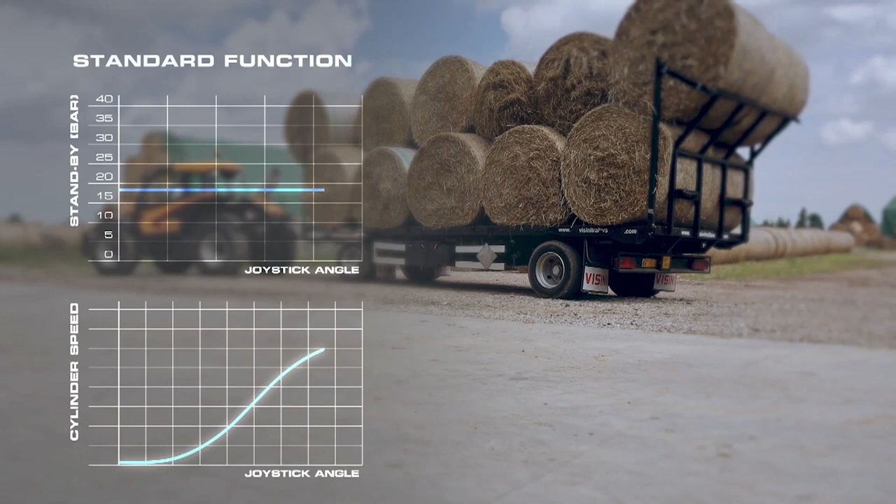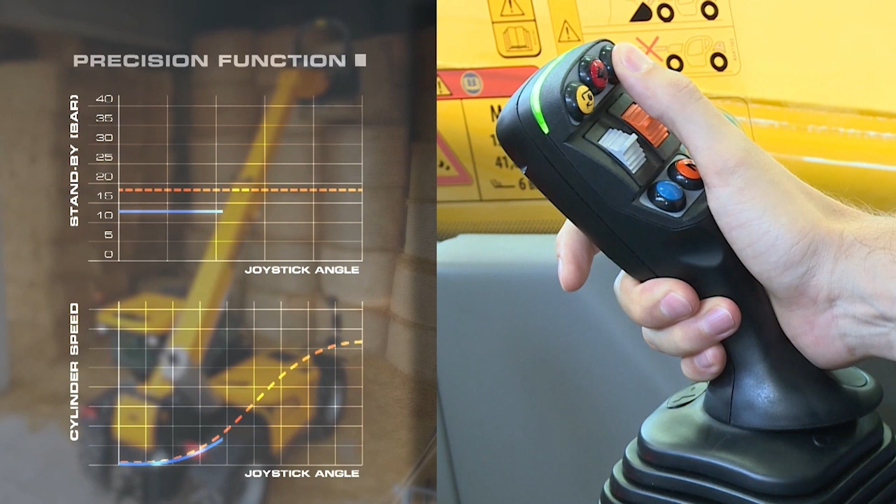Moreover, additional functions are available to optimize control and can be selected by the operator using the joystick controls. The precision function reduces the standby value, allowing improved accuracy and sensitivity of operation. The boost function temporarily increases the standby value for higher speed and productivity without installing larger pumps.

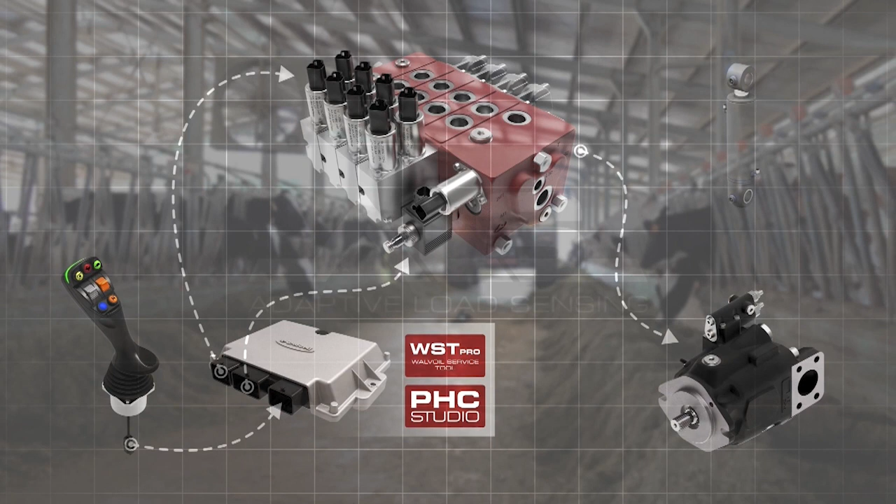Safety. Unlike previous variable standby systems with electronic devices on the pump, adaptive load sensing operates directly on the load sensing hydraulic signal, thus avoiding the complexity associated with signal digitization. The adaptive load sensing system can also provide two independent controls to increase and reduce the signal so that, in the event of faults, the system works with the natural standby of the pump, keeping full functionality. These combined aspects make adaptive load sensing an extremely robust and safe device.

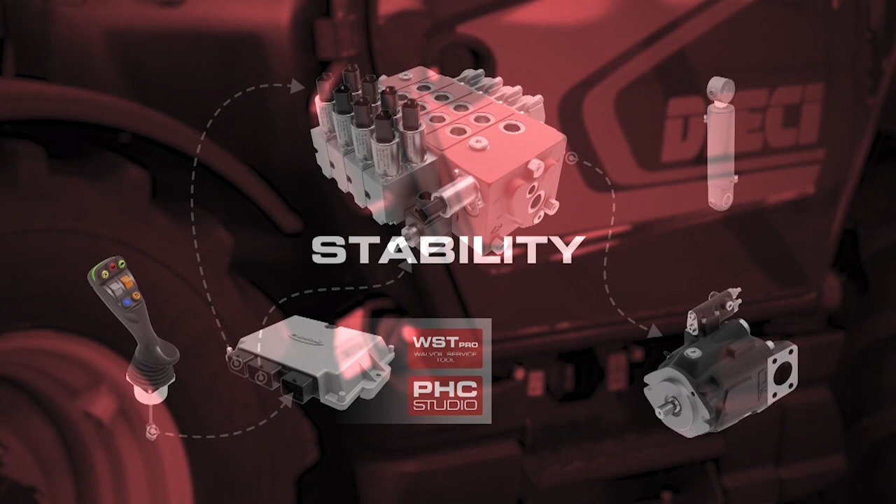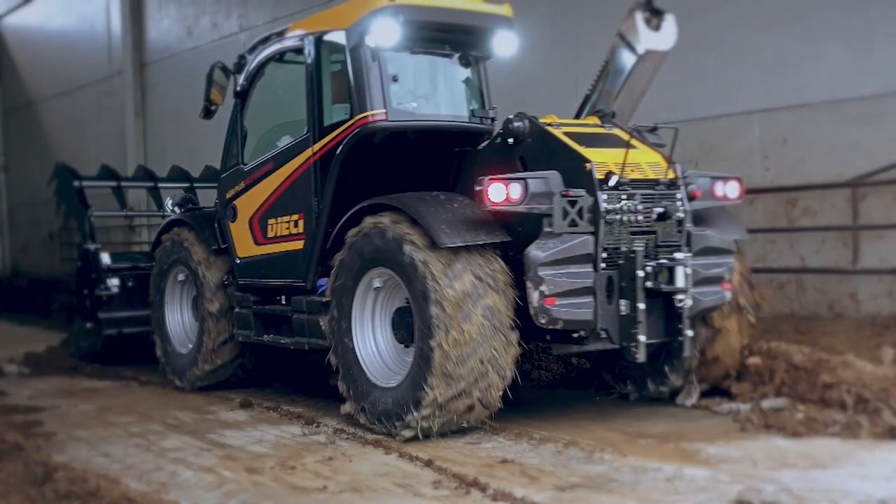Stability. The smart management of the standby pressure differential, combined with the operation of the directional valve, allows optimization of the stability of the machine for more comfortable use. Retrofit: since adaptive load sensing consists of a few additional elements, it can be easily interfaced with traditional hydraulic components and retrofitted on machines already on the market, bringing greater efficiency and productivity.

Energy efficiency, productivity, controllability, customization, safety, stability, retrofit - it's all about the Walvoil Adaptive Load Sensing system.